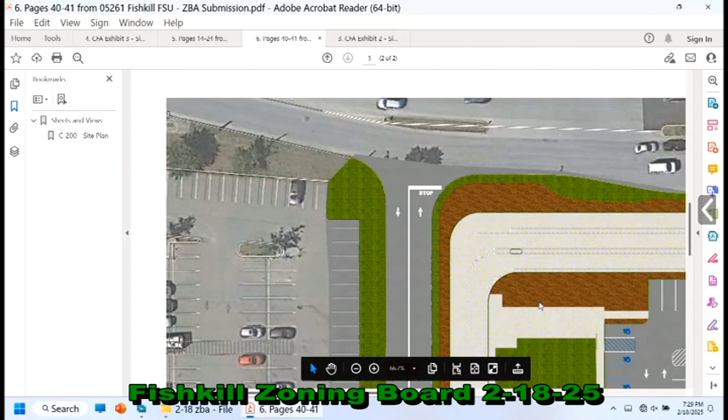Now let's take a look at that Route 9 corner. Can we make that bigger? Sure, I think I can.

It looks like you've got a lot more concrete there than you really need - am I reading that right? The white stripes are hard to see, but you've got two lanes of your full drive-through, and then you've got a third lane acting as a bypass, what they call a flex lane. During peak hours, they could deploy that third lane for a third lane of ordering, which then merges down to 2 lanes. Or also, if third-party orders or mobile app orders become a certain percentage of volume, rather than having those folks park and walk into the store, they can deploy that third lane as a mobile pickup lane.

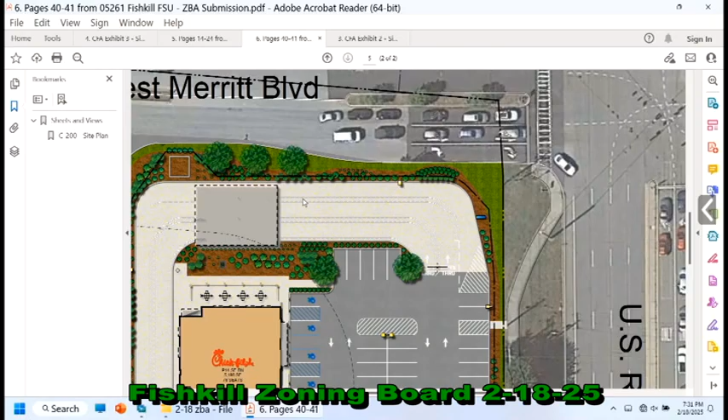So then you don't have to go into the store with the parking spaces in the front? Right, once it becomes a certain percentage of volume, rather than having that volume park, go into the store and leave, they can deploy that third lane as the pickup, so you never have to park and get out of your car. Where would they pick it up - at the awning, or do they have to go all the way around the building? They would enter this third lane, bypass the menu boards since they don't have to place their own order, and then get in queue to pick up their meal at the fulfillment area.

And this is for people who've already ordered, right? That's right, this is for people who already ordered.

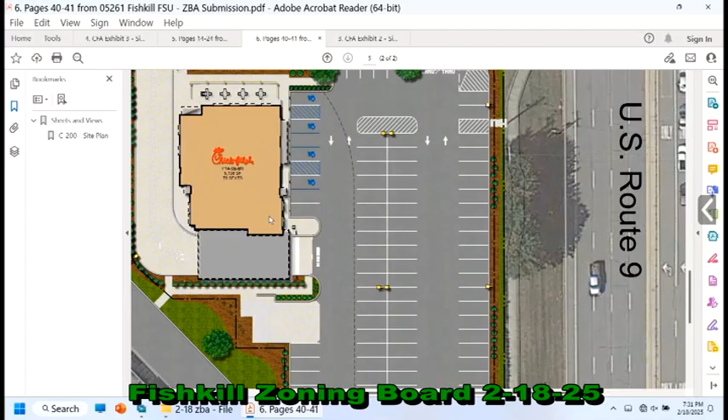That's one use of that third lane. It also acts as the bypass, like I mentioned, and during peak hours, they can deploy that third lane for normal drive-through queue if the demand calls for it.

Do you need those spaces for the pickup in the front, or are you going to have both? No, the majority of the time, if you order ahead, you're parking and going inside to pick up your meal. But in some instances, especially through COVID, the majority of customers started using the mobile app, and if that becomes 25-30% of the business, rather than having that many folks park and go into the store, the mobile app can tell you to go to that outer drive-through lane.

And is that used heavily? Is that used that often where you're putting a whole lane to it? Yeah, to your point also, Ron, like you said, during COVID...

What is the reporting after COVID? Are people still... to me there's a lot of driving, a lot of parking, a lot of cars. So I'm interested in knowing, does this actually reduce the amount of exhaust and running cars? Because it sounds like you're in and out, ordering online or in the queue. To me it just looks like a whole lot of cars and a whole lot of movement, and I'm curious, is this actually reducing the amount of exhaust, cars sitting and waiting and running? Or is it just setting things up so people who don't feel like getting out of their cars can just sit? I mean, I park as close as I can to the door too, I get it. That's not anything disparaging about your customers, but I am curious, to Ron's point.

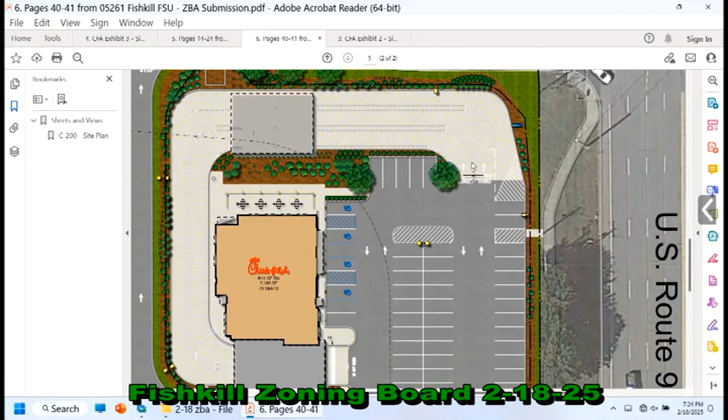Yeah, so the stat that I have, and we can back into what that makes: from the pickup window to the drive-through entrance, about 40 cars. 40 cars, 20 each lane. That's a lot of cars. Very optimistic. That's a lot of cars.

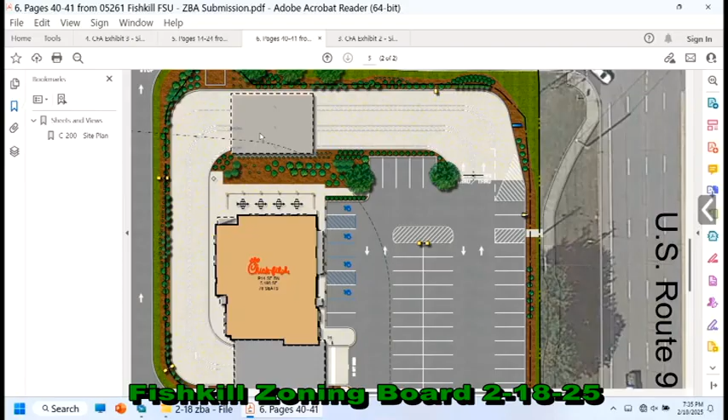So Chick-fil-A is very different than your typical quick-serve restaurant that we might be familiar with around here. Bohler, the firm I work for, is actually partnered with Chick-fil-A across the East Coast, out of New York State. I've been working with them since 2016, when we first started in the Syracuse market, and we expanded out west to Buffalo and Albany. As more stores open, we get more knowledgeable. We've studied queues, traffic demands, and parking demands at other locations, and that is what backed us into the size of the drive-throughs that we are proposing and need.

Have you ever considered using a permeable surface? I mean, that's a lot - for me personally, and it is an underutilized parking lot, but it just seems like a concrete jungle. What I'm looking at is trying to cut down on that. Well, we're going from 77% to 79%.

It's really not a significant impact from what's out there today. It's a paved parking lot today, and we're trying to provide new use to it. We have the data that supports the size of the site, the stacking, and the parking that we feel we need, and that's what we're requesting. It's a busy area.

We want to build it. Yeah, there's a lot of traffic. You think there's some way we can cut down that corner?

It's only quote unquote 2%, but it's still 2% in an environmental wasteland, where we're really losing ground as far as habitats and even just those intermittent places where wildlife can pause before they go across another parking lot. That always comes to my mind when I'm looking at things like this.

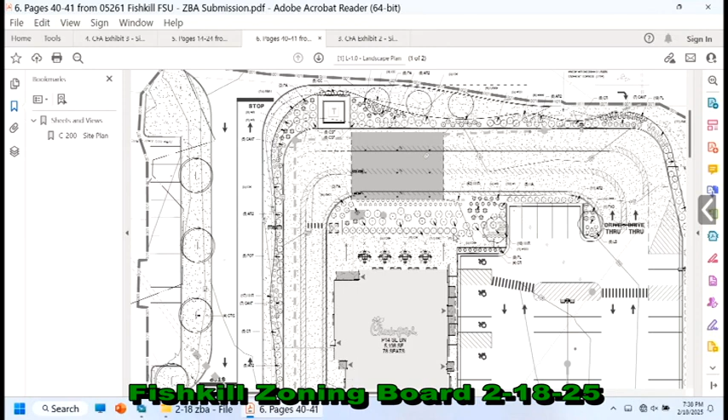Just to share, this is the landscaping plan submitted with the application. They really take pride in their landscaping. Look at all those shrubs, trees, landscape architecture that went into the thought here. It's not a 'let's pave the site and just have grass' approach. They want it to look good and provide the buffering you're talking about, to break up the large pavement surfaces.

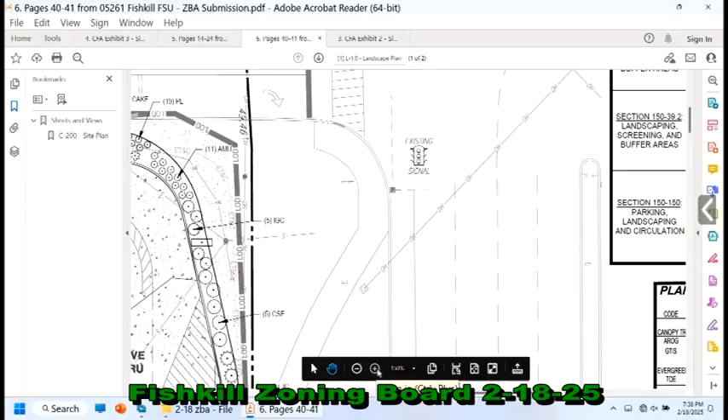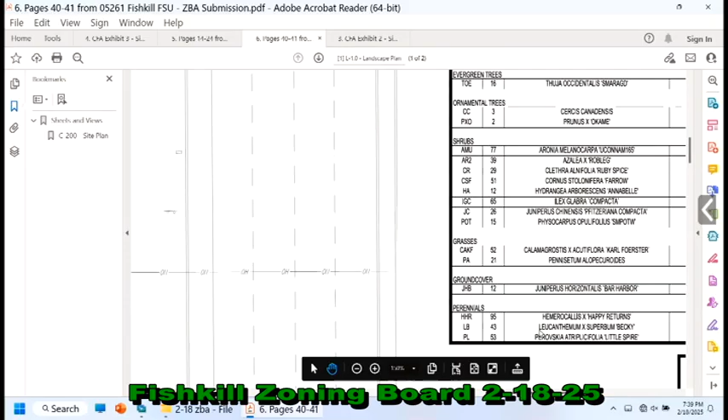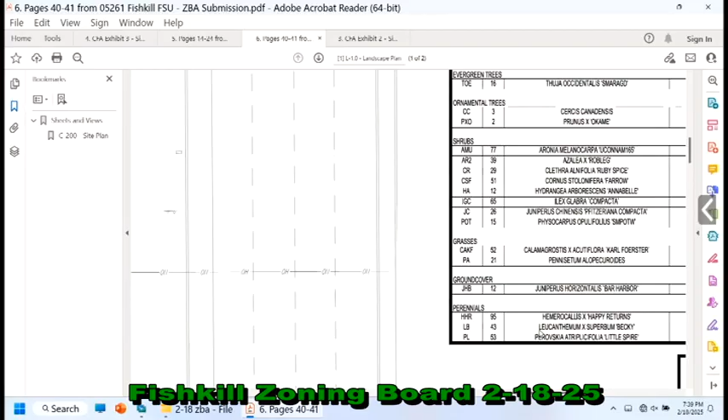In this table, it's some impressive numbers: seven canopy trees, 16 evergreen trees, 5 ornamental trees, 77 of these shrubs, 39 of those shrubs, 51, 29, 65, 26, 15 grasses of different ornamental types, 52 of them, 21, 12 perennials, 95, 43, 53. They like landscaping. So I hope that helps offset that 2% a little, because it's not going to be just mowed grass area. They're trying to really beautify this corner.

I could just jump in for one second, just to remind the board and the applicant what we're doing here tonight. We're getting into an awful lot of minutia of things typically reserved for the public hearing. I think the public, once the hearing is opened, can benefit a lot from these comments, and the more we get into the nitty-gritty detail of the planning now, the more that ends up not happening in the public hearing when the public is here to hear it and comment. So just as a reminder, we're here to hear any updates, hear where they are at the planning board, and then see whether it's appropriate to accept it, refer it, and schedule it for a hearing.

Thanks for keeping me on track. Okay, so number 5, the last area variance is the same thing related to that drive-through entrance—similar to the canopy, two variances for the canopy, two variances for the drive-through entrance in the front yard, given those setbacks of the property line and the center line of the road.

Do we want to jump over to signage next? Sure, let's jump that over. Signage: there are 4 additional area variances requested from signage.

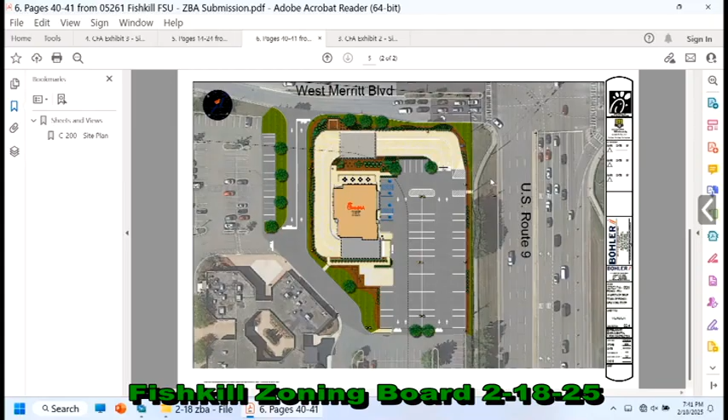We got wall sign size—you're allowed 40 square feet of aggregate of all your signage together, where 211 is proposed. We're proposing a monument sign; 1 is allowed per lot, and we're proposing a second one. Here is the first one, way down here for the mall, or the town center and this outparcel.

That's the town center sign, right? It's the town center sign, that's right. We're proposing a monument sign here—that makes sense, right? Here's our access drive. So far away from the sign—you need to see the sign relatively in the area where you're going to make a traffic maneuver to enter the site. Yeah, we'll save that whole discussion for the public hearing.

Primary signs per establishment: 1 is allowed, 5 are proposed. And a freestanding sign per establishment: 0 is allowed, 1 is proposed. Where is the 5th one? 5 primary signs, 4 in the building—where's the 5th one?

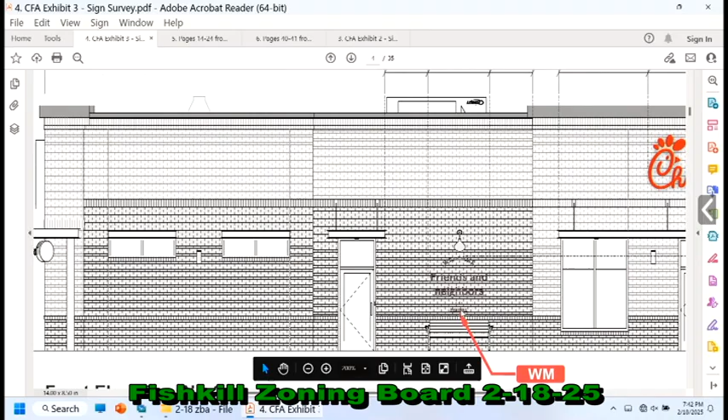Right here—this is considered a sign. That's the 5th one. That's what you said, it wasn't identifying—it's not a restaurant branding sign. They like it because it connects to the community; it says, 'Welcome, friends and neighbors,' and right at the bottom it says Fishkill, so that's their stamp of the local area on the sides. And the wall signage there is a very basic script saying what it is, and that's it—no other branding besides the wall signage with the name of the restaurant. Those are proposed on all 4 sides, given we're a standalone pad site, attracting customers from all 4 directions.

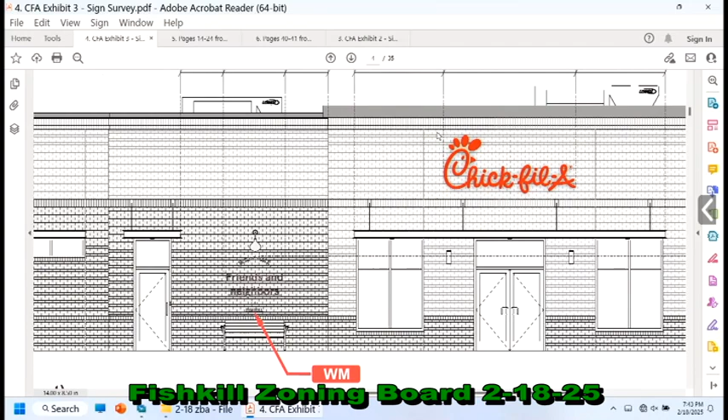Any additional questions for what we're proposing? Sorry.

I don't think so. Okay. I was going to turn it over to Melissa real quick just to address the county comments, unless the board wanted to just go into discussion from here. Did Melissa want to speak? That'd be fine, sure. I'm sorry. I got you. Thank you very much.

I try not to get too far into the weeds, but when we reviewed the county comments, there's a number of written recommendations that do not appear to align with the final determination to deny. It sounds like these are largely local concern, and instead of checking that box, it may have just been an oversight or done in haste, but unfortunately it means the ZBA would have to overcome it by a supermajority if they chose to.

I think one thing we wanted to point out is that the county's review is limited to what impacts the inter-community. I brought the GML with me, and it talks about bringing pertinent inter-community and county-wide planning and zoning considerations to the attention. I think a lot of these variances are actually internal to the site and not necessarily along Route 9. We briefly wanted to go over some of the area variance standards, if that's okay.